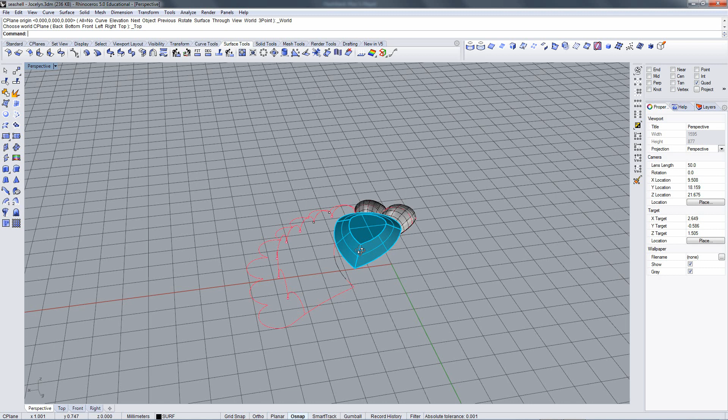First thing, you want to make sure that you have your stone up off the ground. You want to make your curves as simple as you can. So first thing you want is a general outline, which you have. But this is very, see how many pieces there are here? You don't need that many pieces.

So if I were drawing this curve, I would use my favorite sketching tool, which is interpolate curve, end snap. And then I would just draw something that I like. Like that.

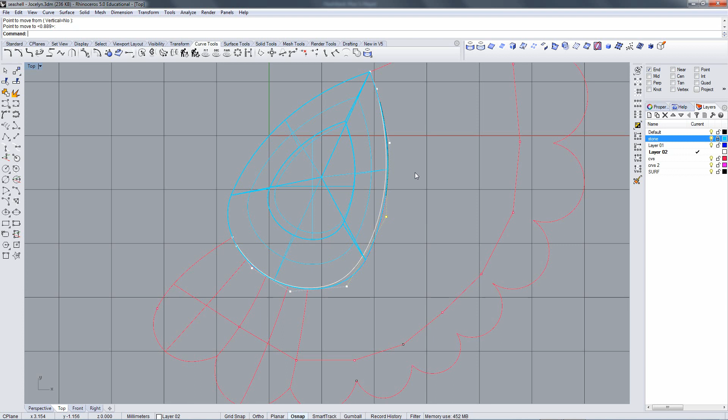You probably want this to come underneath the stone a little bit. So, turn on some control points. Just a little bit. Now these don't touch anymore, so I'll have to change that.

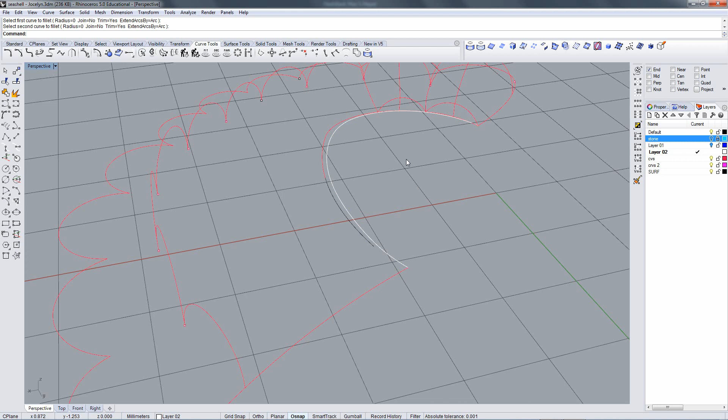The fillet set to 0. That'll bring those together. I want to see if it gave me 2 curves. See, it did. I don't want 2 curves. I want a simple, basic curve there. The math is really important. And for a curve that simple, I can do a 4-3, which is always a pretty curve.

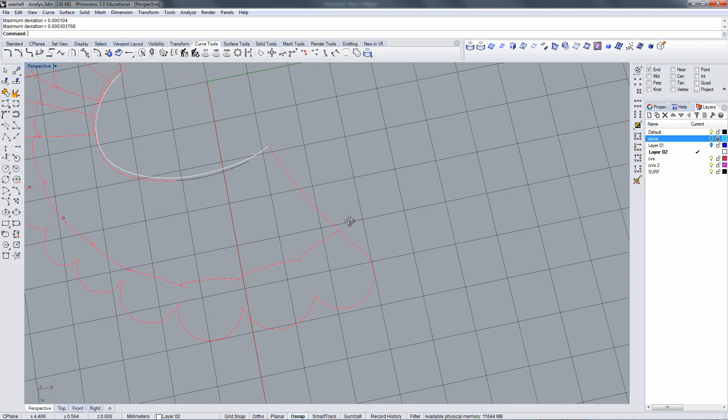So I've got that. How did you draw these? Was this just a series of circles? No, I did an arc command. Okay, and this is a shape.

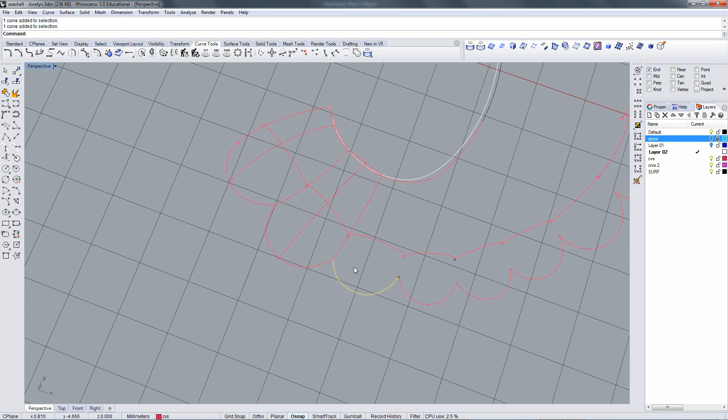Now, the challenge with what Jocelyn has done is that she's created a form that's going to be awkward to work with. I would always recommend that you make one of these and then shape it to do what you want it to do.

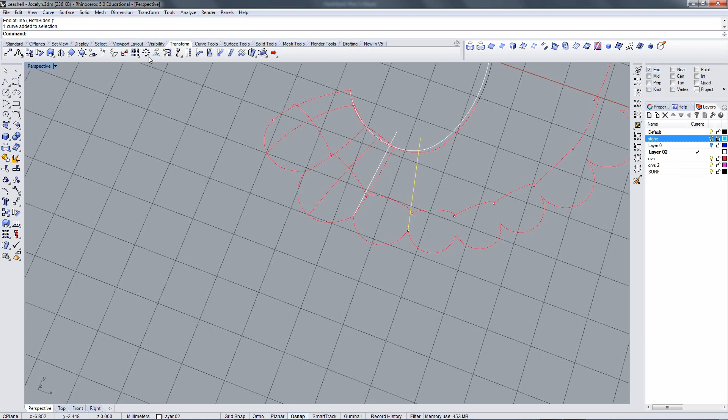So I would create one single shape. Maybe something like that. I'm going to want it to be a little bit wide. Better too wide than too narrow, because too narrow, I don't have enough material. Too wide, I have too much. I can live with too much.

I'm also going to move these down a little bit because I want a nice smooth connection.

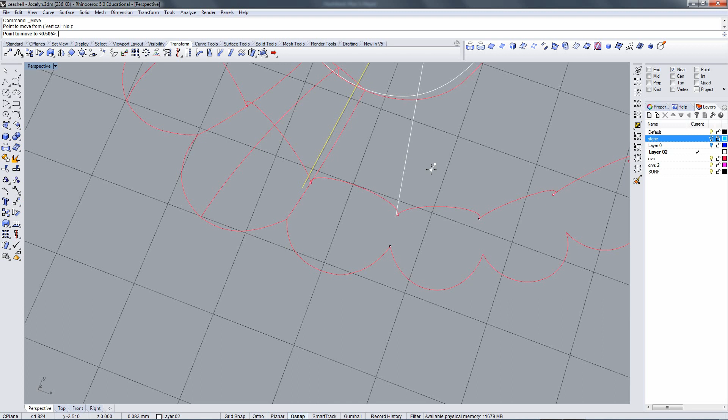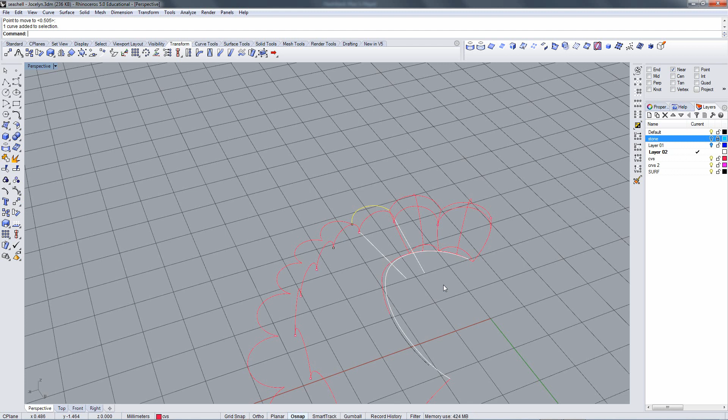I'm just thinking there's a more elegant way to make this, and I'm trying to figure out what that more elegant way would be. Whenever you're trying to make something simple, you try and keep it simple, if that makes any sense. And I think I can probably come pretty close to creating this with a solid.

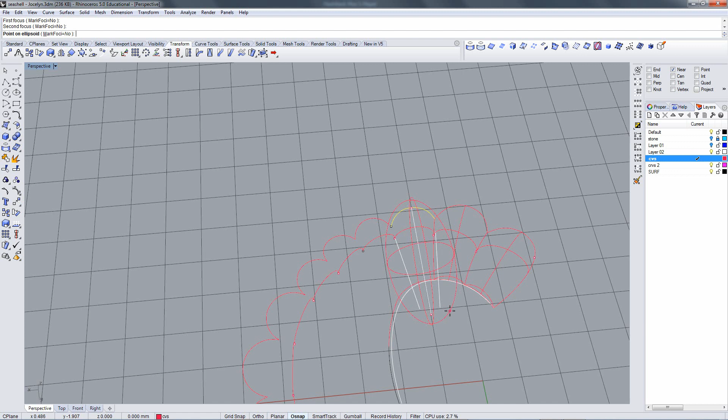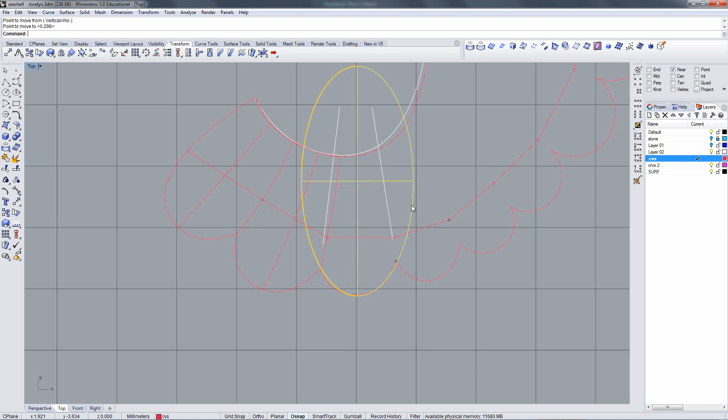I can probably do an ellipsoid, from like here to like here, something like that. And then I can decide how to make that work for what I want it to do.

Have you watched the video I put up on how to work with domes? I put it up yesterday. You're going to want to watch that, it's a good video. So my challenge with this object is that it's not on any construction plane I can use. And by now, you know Professor Nelson, he digs a construction plane. I am always fussing over construction planes.

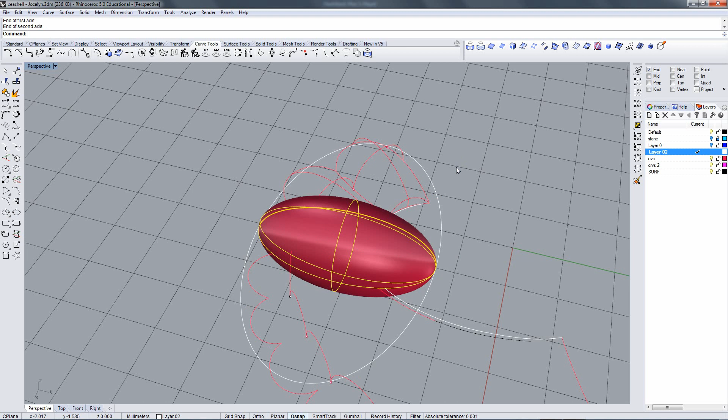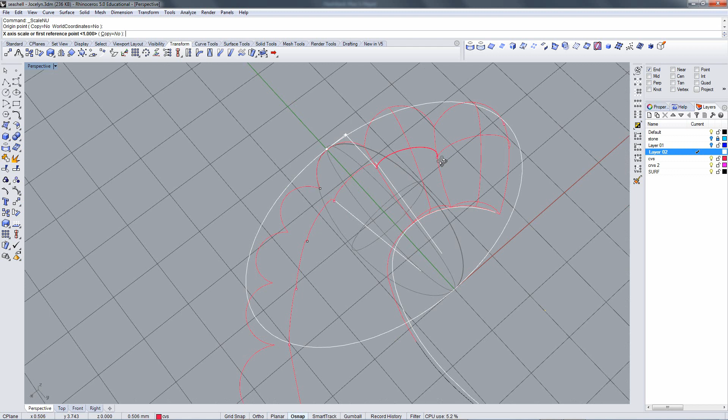If I set a CPlane to that, now I have a CPlane that works with this object. And that's important, because if I use non-uniform scale, it's always locked to the current construction plane. So now you can see those handles, see how they're parallel to the grid? That means I know what they're going to do, kind of like a top perspective.

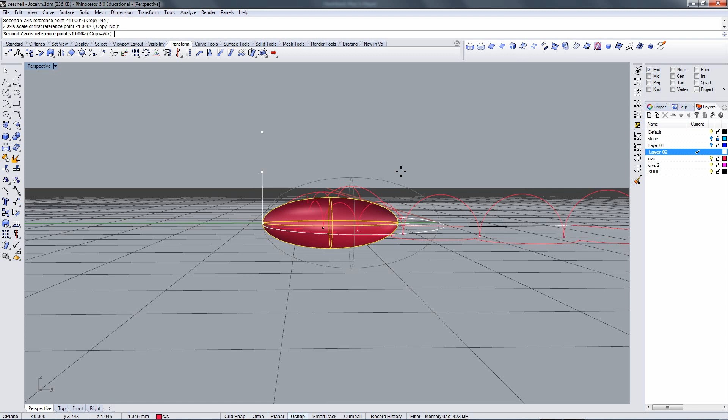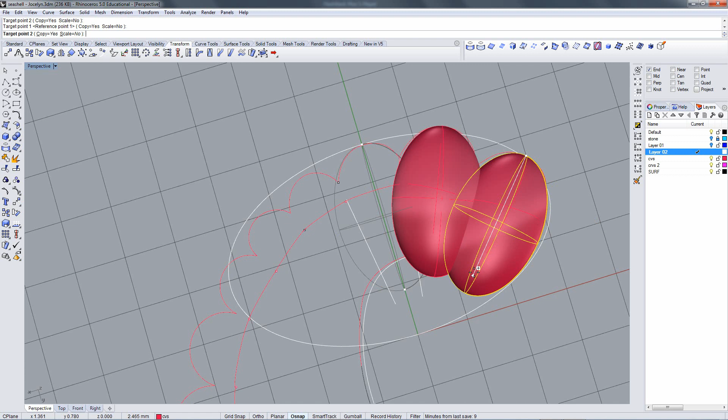That's giving me more. And then for height, I think maybe something more like that. I'm going to just put some of these out here, to see if I like what I'm getting.

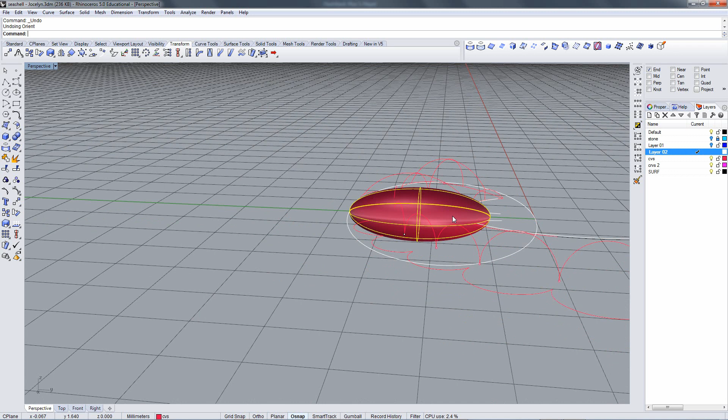Do you find that helpful? And it's not hard to do, right? It's easy to do. So now that I know that's going to work, I want to cut this in half, because I only want the top half of the dome.

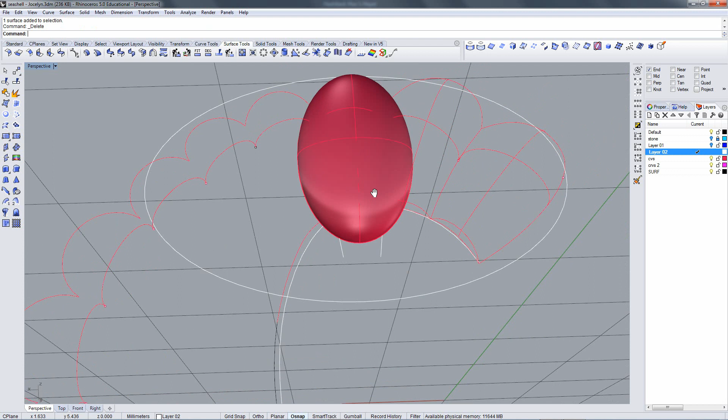Cutting plane, and snap. Trim the bottom off. And then in that video, I talk about how to make the surface shrink back. Because right now, if I untrim this surface, sorry.

Where's the surface edit tool? Right here. Thank you. And I hit untrim all, it goes back into being that. That means in Rhino's memory, Jocelyn, this will always be that.

But if I come back here and click on this tool, right click on it, the surface looks the same. But if I untrim it now, it looks like that. If I turn on the control points, they look like that.

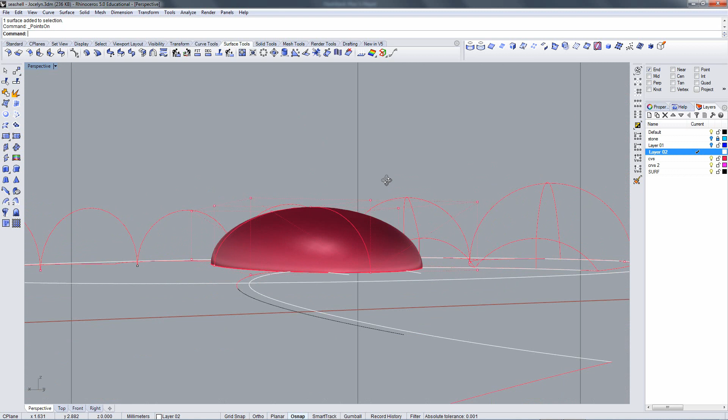And the other choice is to left click on it. That does kind of the same thing. You want to look and see which one you like better, but this did the same.

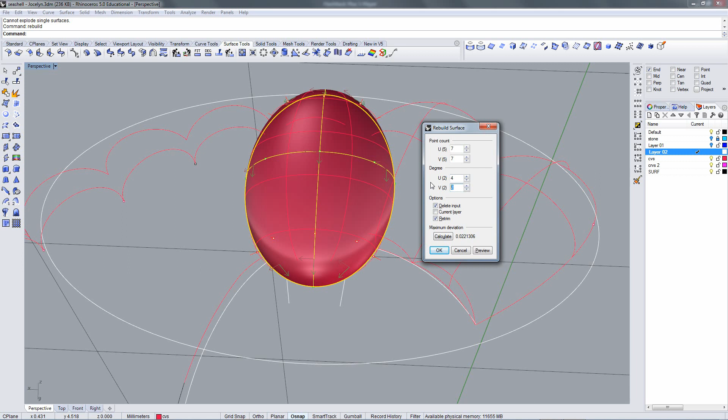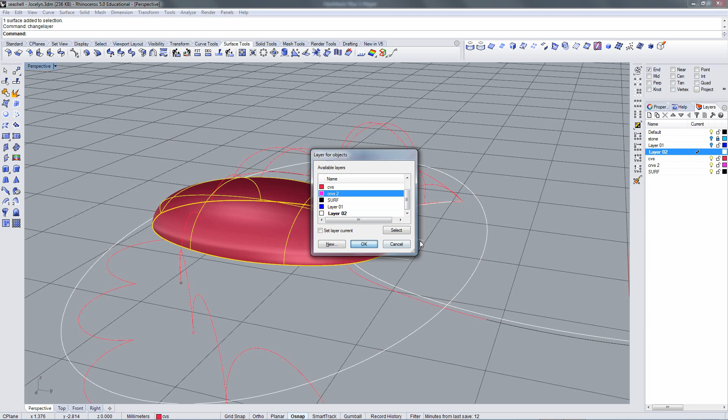So now I'm going to try and rebuild it, so I can get a surface that I can work with in case I want to. Now I'm done with that. The reason I did that, Jocelyn, is so that if I want to come in later and make changes to it, let's put this on a different layer so I'm not competing. Let's say I want to bring that down in elevation at some point.

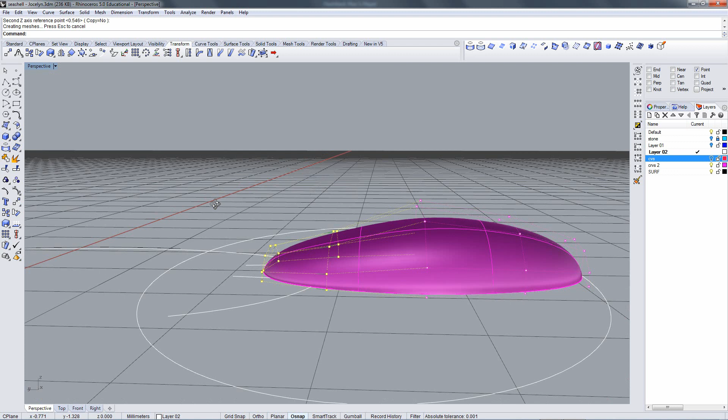I'll be able to do that. You can't do that with the ellipsoid, it'd be much harder. So cutting it into a simple surface gives me more freedom.

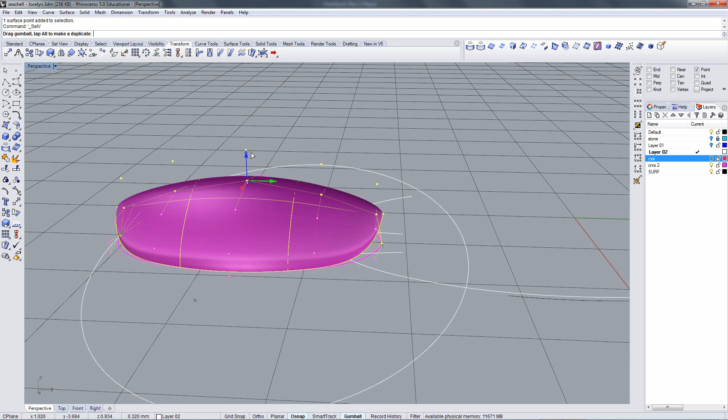If I wanted to, I could select all of those, except for the end ones. Don't want to pick the end ones because that'll lift it off the ground. So if I wanted to, I could do that. Take off the end ones again because I don't want to lift it off.

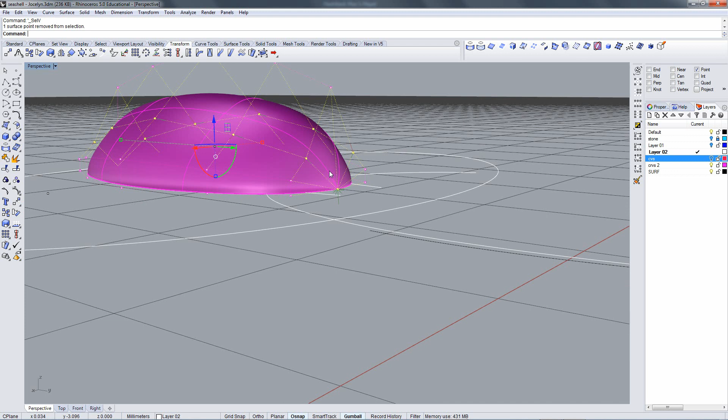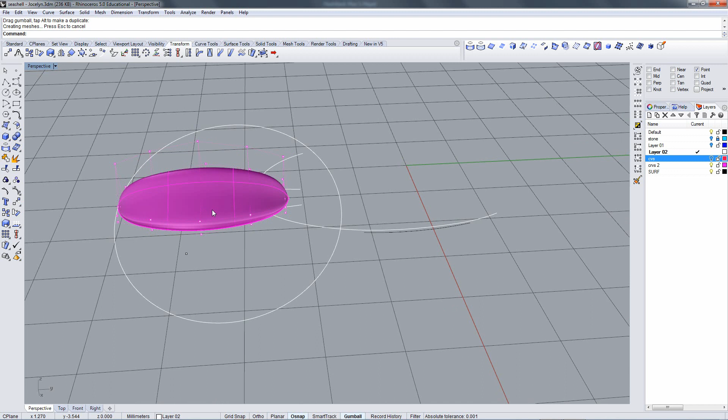Just as an example of things I could play with. And that kind of stuff would be very hard to do with it as a full ellipsoid. Whereas as this little surface, it's much easier to play with.

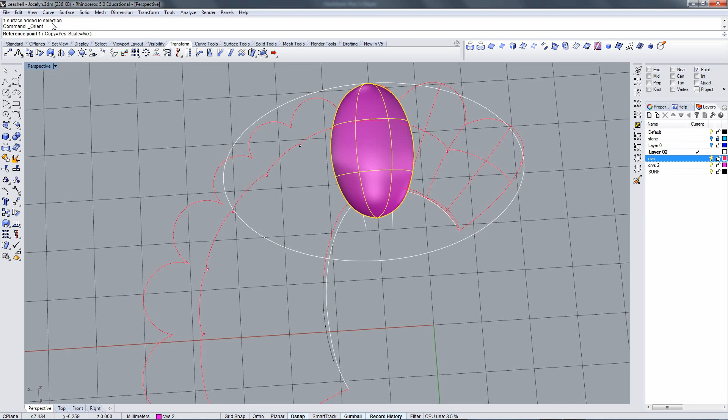Okay, so now I'm going to take this and do your pattern with it. I'm going to do that same, record history, and do that same command: orient 2 points, copy yes, scale no. And I can go into the top viewport for this. I'm going to pick 2 reference points, and then pick 2 target points.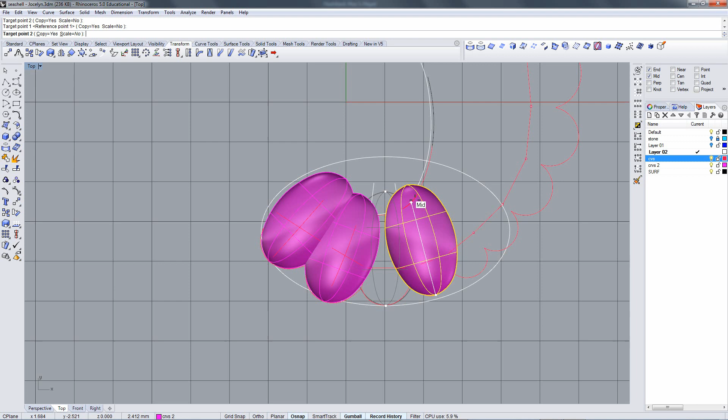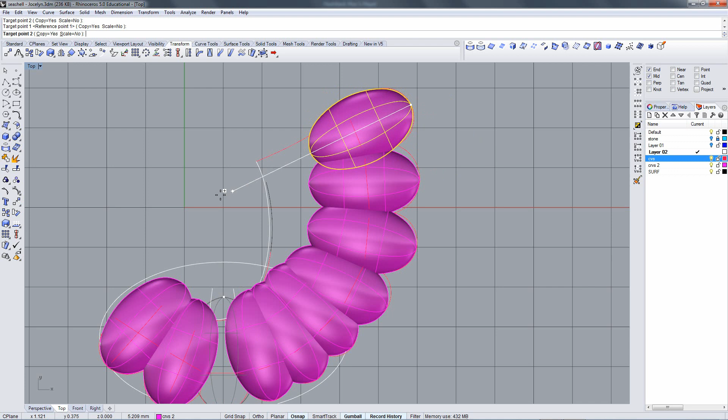And I can do as many of these as I want to. Okay?

It's not perfect, right? But it gives me a starting point to look at this thing and see what it is. To make it better, first I've got to remember which one was my first one.

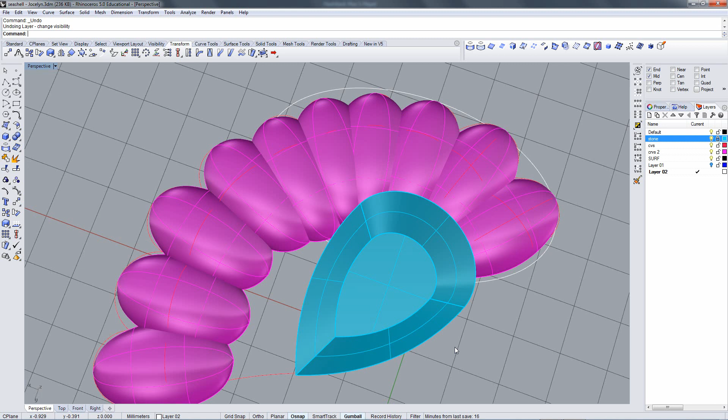So I want you in a color I can find. Because now, if I change this one, they all change.

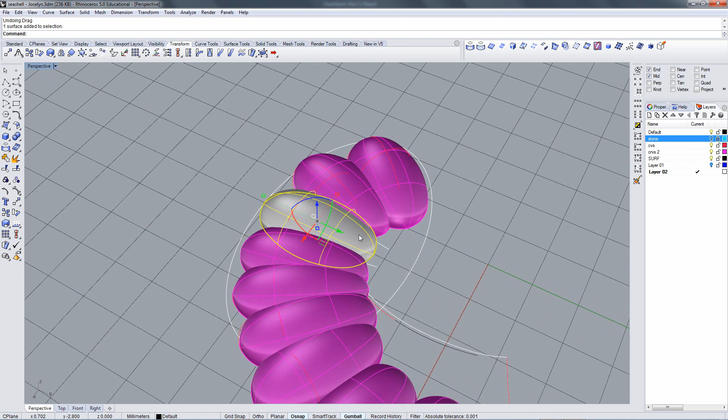And that'll be helpful because I do think I want to play with those control points a little bit. I think it would be cool to bring them down.

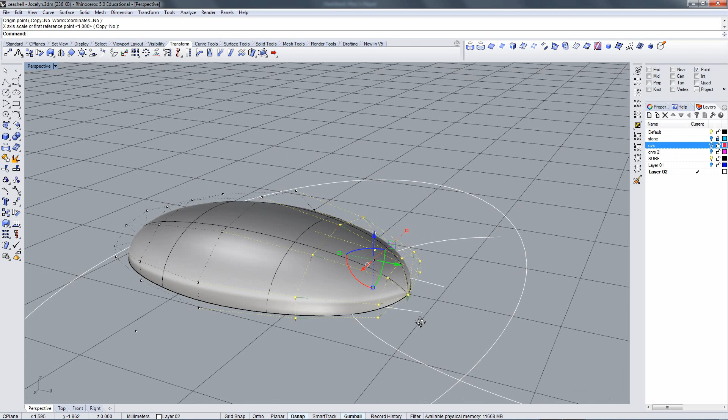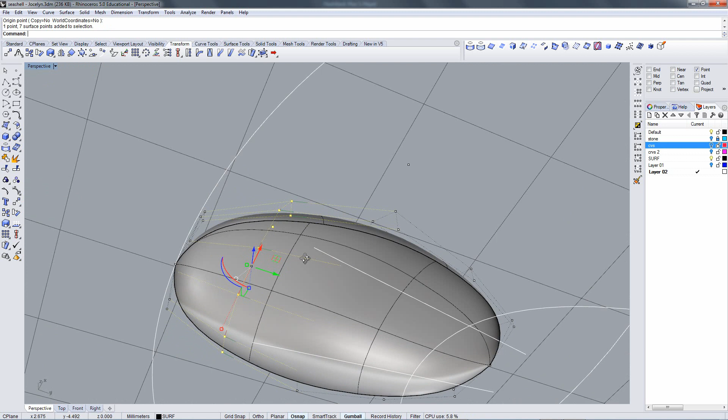Maybe. And also like to lift these up. Only want... not sure what that point is. Okay, apparently it was in your drawing. All right, scared me a little.

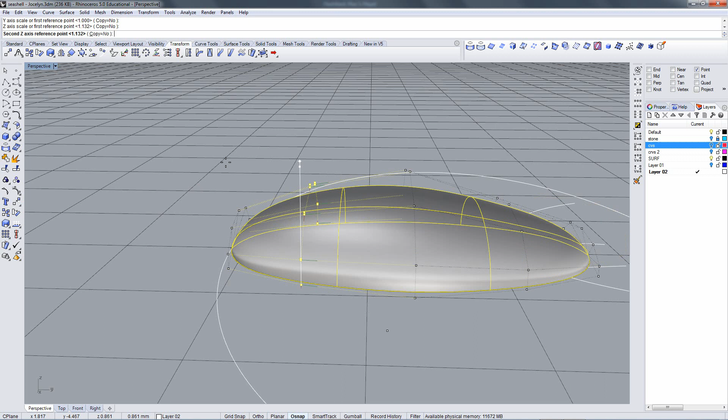That's going to give me a little bit more of a... Now that I've done that and I look at all the other ones, they will have done the same thing.

Now I'm going to come back and look at your individual petals. Put your drawing back on for that. It's going to yell at me every time I move one of these. And I'm okay, I don't care.

I'm going to set a CPlane. I'm going to have to keep setting CPlanes for each one of these to make it do what I want it to do.

But since CPlanes are easy to make, all I'm going to do is make an oval that this sits on using the two ends. I don't care how wide the oval is, it doesn't matter. The CPlane will still follow it. And that's important to me because I want to do my non-uniform scale.

No change this direction, but you want that to come all the way back, right? And nothing in the Z, because that's the first one.

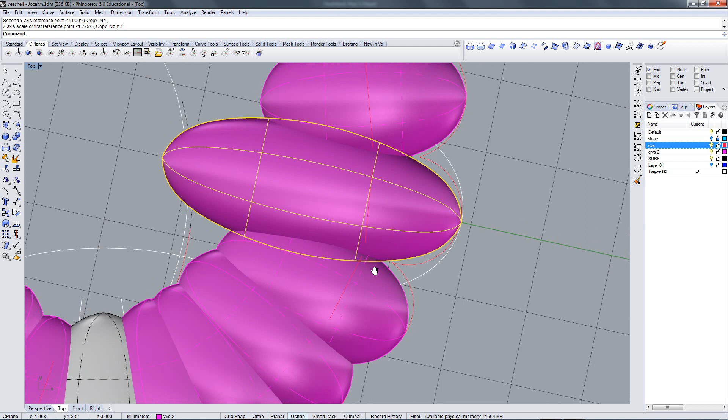I'm going to come over to this guy. I'm going to move him here. It's going to get angry at me. Got to do the same process with the CPlane. Give it an oval that I can assign the CPlane to.

Take this and do a non-uniform scale. Now I think this one's a little too narrow, I'm going to fatten it up a little bit. I think the other one was a little too narrow too, I'll go back and fix it.

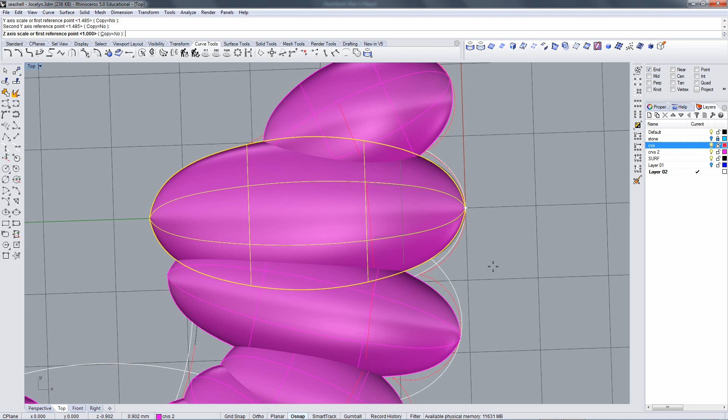And then we have this one. Set an oval to it. Set a CPlane to that oval. And I can play with this one as well.

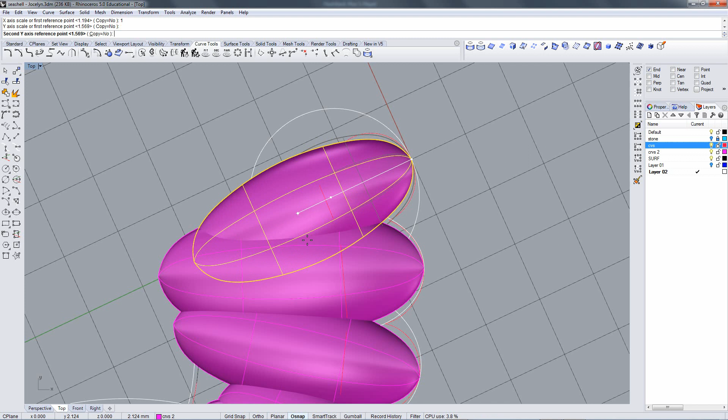Okay, so you can see that I am going to end up assigning a CPlane to each and every one of these. Before I do, though, I want to make sure they're in the right position, because there's no point setting a CPlane if I'm going to change the location.

So put it in the middle. Take a look and see if I think that's a good angle. I think it's a pretty good angle. And then I'll put a curve tool.

CPlane, oval. Same thing, non-uniform scale. I'm always looking: if I don't want to get wider, I leave that at 1.

This one I want longer. This one I want to stay the same height, so I keep it 1. Move to the next one.

Now at some point, these are going to be okay. I think this one on are all right. I think this is the last one I have to fuss with.

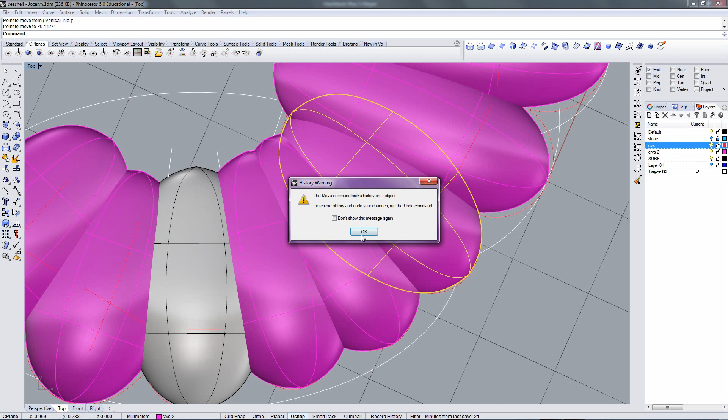I think it needs to be rotated a little bit too before I make a CPlane for it. Yeah, like that. And now I'm going to make a CPlane for it.

Set a CPlane to that oval. So why can I set the CPlane to the curve but not to this? Why can I set the CPlane to this curve but I can't set it to that?

Oh, because that object's... what does a CPlane need? A CPlane? Yeah, the key is in the second word. Plane? Yeah, what does plane mean in Rhino? Means flat. What? This is planar.

This is planar. In Rhino it means flat. So when you say set CPlane, automatically it's looking for something flat. It has to be a flat object, flat in dimensional space. The front of the screen is also planar, that wall is also planar, that picture frame is also planar. But you can't set it to the surface because the surface is round. Rhino won't know how to set a CPlane to something that does this. It has to be flat. That's why.

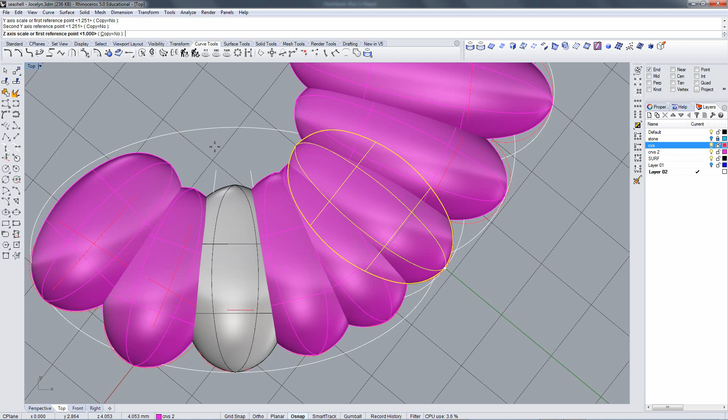Okay, so now this is the new basic thing, right? I'm going to go wireframe. And for each one of these now, I can come back and do more control. I'm going to set a CPlane. You're going to use those CPlanes again and again for each one of these. Turn on the control points.

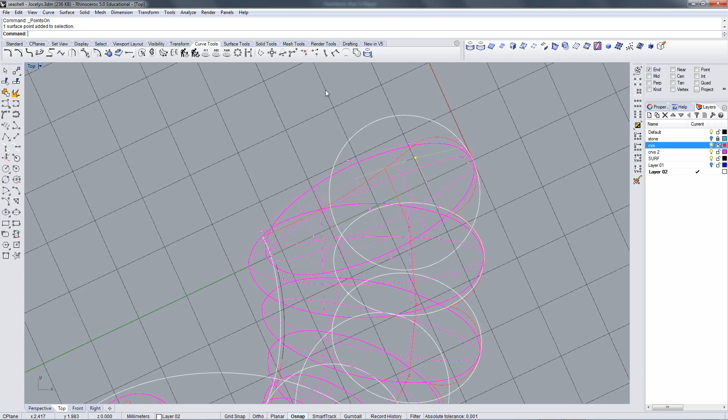This is a cool toolbar over here. You can find it under Select. It's the little magnifying glass with loops. It's the lasso points. If you click on the little black triangle, it'll give you that toolbar, and then I just come over here and slap it on the side. That's really useful because you can use it to select a whole row of points.

And once you've got a whole row of points, because the grid, the CPlane, matches this, I can just hold down ortho and push. Same thing here, I can grab that point, set of points, because I used an odd number of points, Jocelyn, so I have a center line. I can snap to that center point, and I can make it narrower here.

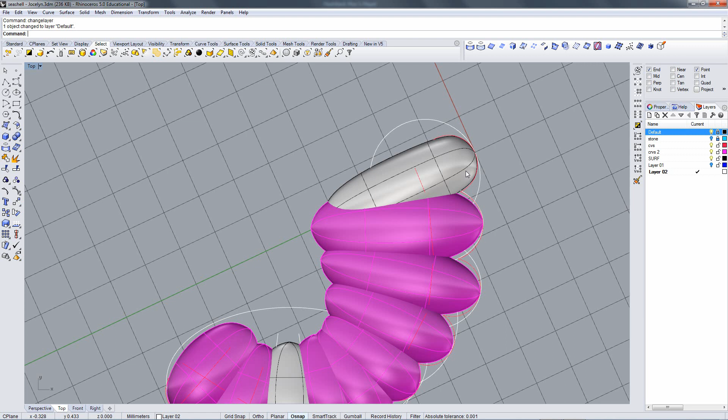And that's a different thing than we had before. Each time I've changed one, I'm going to put it on a different layer so I don't get confused as to what I've worked on and what I haven't. And I'm going to lock that layer so I can't accidentally select it anymore. Going to the next one: wireframe mode, pick its oval, CPlane to object, turn its control points on, grab this row of points, pull them forward.

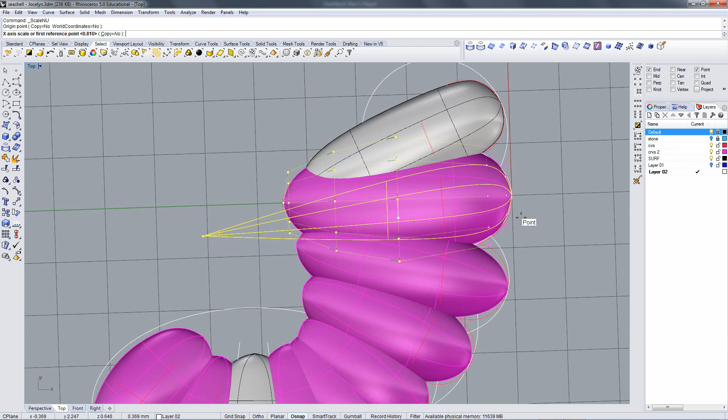I think that might be okay. I don't know if I need to, maybe I will taper these down a little bit, all of them. If I want to do it gradually, I'll do one row, deselect that row, do the next row, deselect that row, and do the last row.

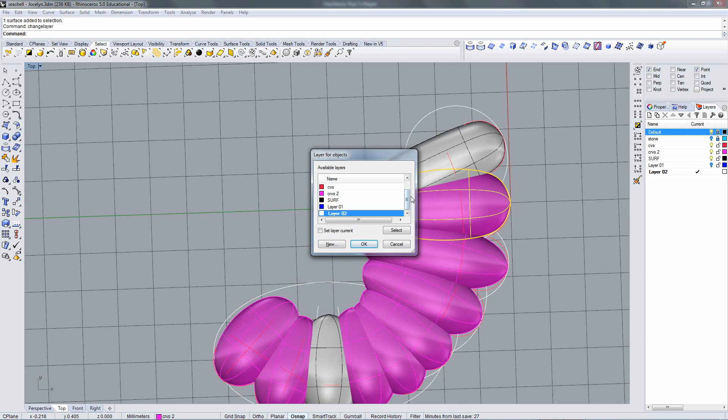Okay. Same thing here, but in order to work on this, I can't use this CPlane, can I? Because if I turn on my control points and grab that same row of points, Jocelyn, and hold down my shift key so I can move them straight, are they going to go this way? No, they're going to go that way. They're going to follow the CPlane. Can you see the grid? See how it's following the grid? It can't go any other way as long as I'm holding shift key.

Now I can try and do it by eye, but that's a mess. Whereas if I just select its oval that I made for it, and set a CPlane to it, now I can grab those points, use my shift key, move them forward. Easy. I'll do the same thing I did on the last one.

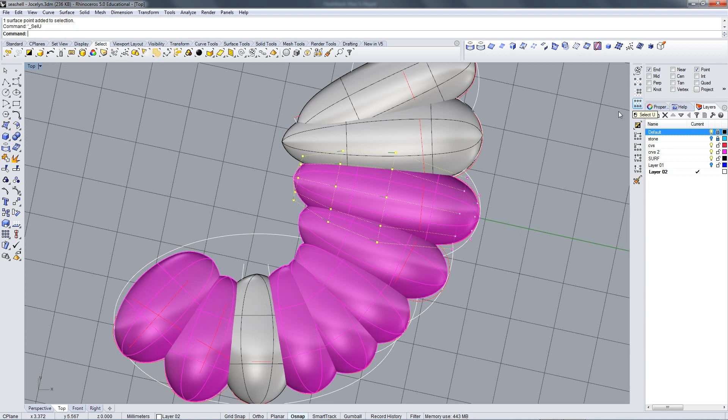I'll grab those three rows of points, do a non-uniform scale, deselect... oh, didn't want to do that. Instead of deselecting it, I'll just select the next two. Non-uniform scale. And that's probably enough.

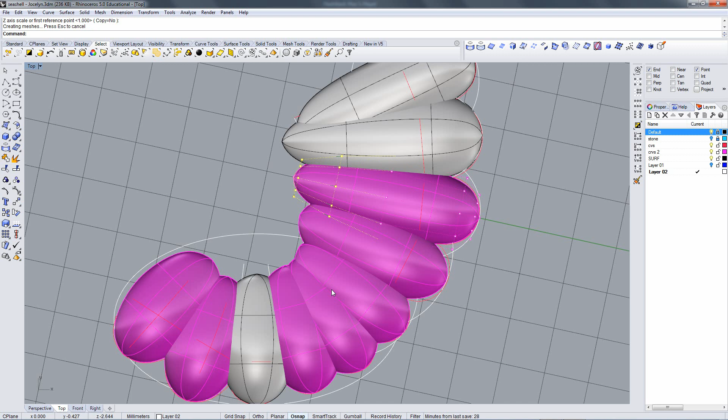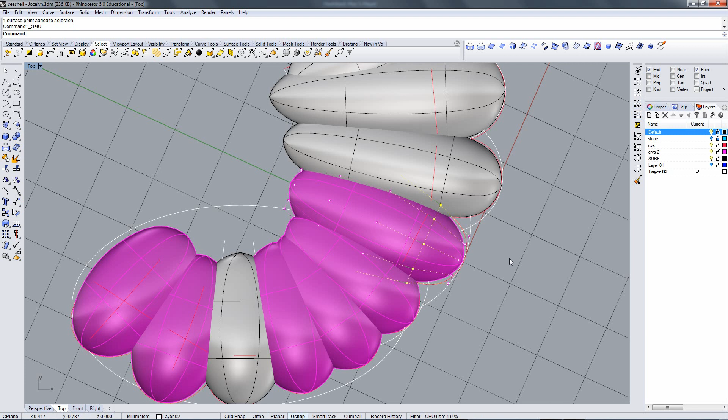Now for a maquette, this is pretty detailed, probably more detailed than you would ever have to do. Is it taking me very long to do? No, it's not. Setting a CPlane, turning on my points, grabbing the points, moving them. Actually, this one I'm probably going to want to grab this row of points and move it too, it's just a little too pointy. I think the width on that one is okay.

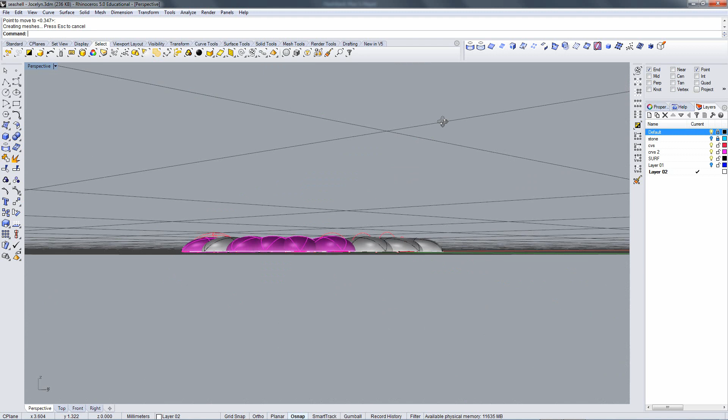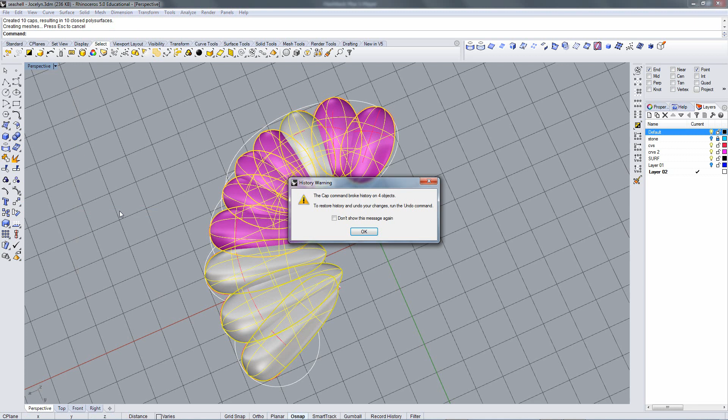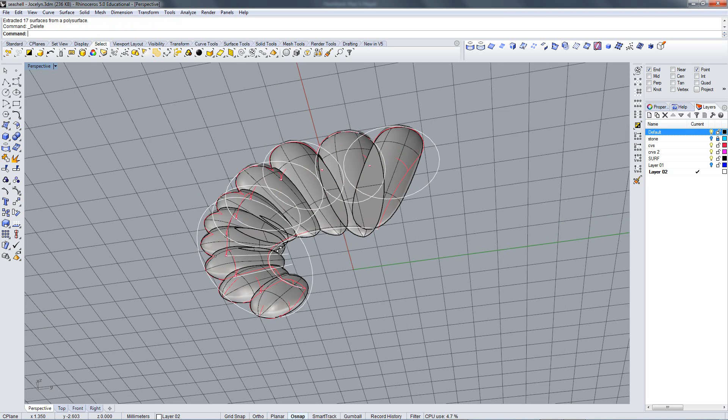So, that's my new set of stuff. Now what I'm going to want to do is put a cap on the back of each one of these so they're a solid object, because they're all flat and open on the back, and if it's flat and open, Rhino can work with that. Solid cap planar holes, solid union. Now I'll come in and take the bottoms off. I only put bottoms on it so I could Boolean union it. I don't really want bottoms yet because there's no thickness yet. So get rid of all of those little pieces.

Do you understand what I'm doing with that? I right-clicked on this. If you right-click on it, it extracts a surface. Then I can choose whether I want a copy of the surface or not. I'm saying copy no, so it'll strip it off, and then I'm deleting it, because what I want to see is just this kind of open shell shape.

I'm going to grab all of those, duplicate the edge, and extrude it straight down. Maybe about that thick.

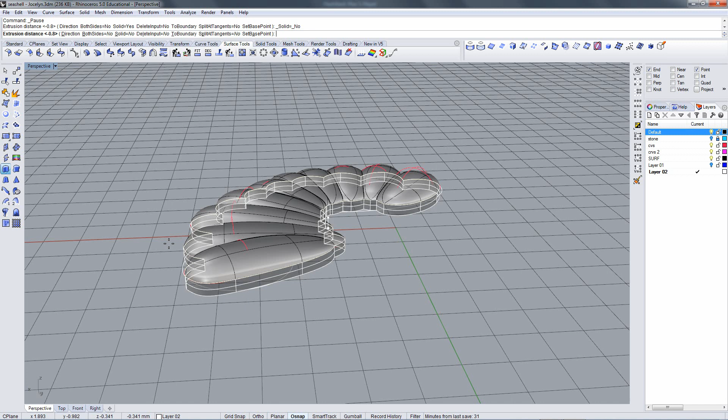1.5? Does that look thick enough? What thickness, what looks good to you? 0.5? That's too thin. Just do it by eye. You're the designer. Does that look about as thick as you want it, or do you want it thinner?

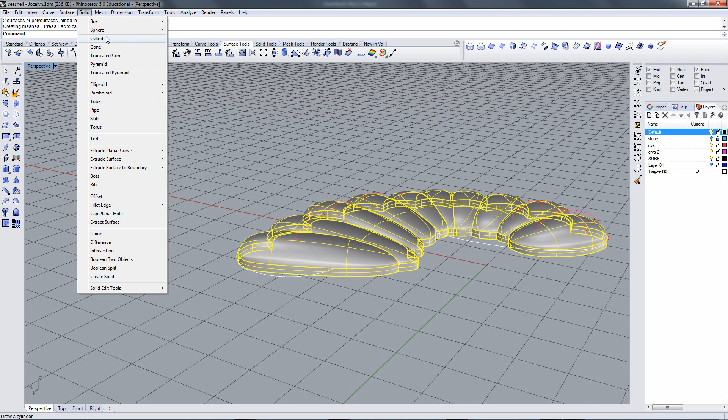About here? Okay, fine. So you've got that. Join that together. Put a cap on the back of that. Where to go? Cap planar holes.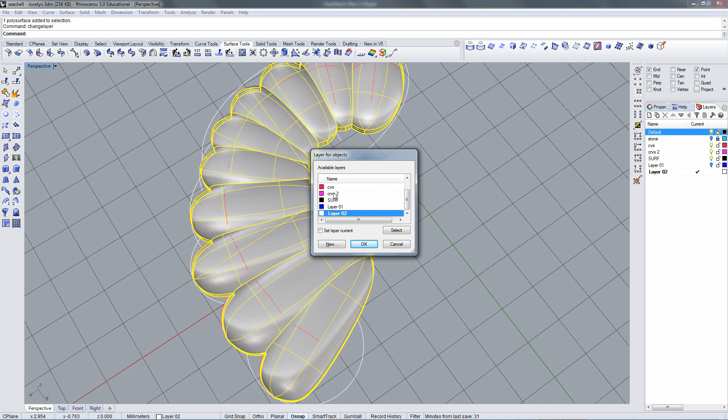And there's your cake. It's not perfect, it has problems, but you wouldn't want to spend any more time than this on a maquette. This is just to show yourself, do you like it? That's its only purpose, is for you to be able to look at it and go, do I like where that's going? And in your case, you have a couple more steps to do because you already know what you want the outline to be.

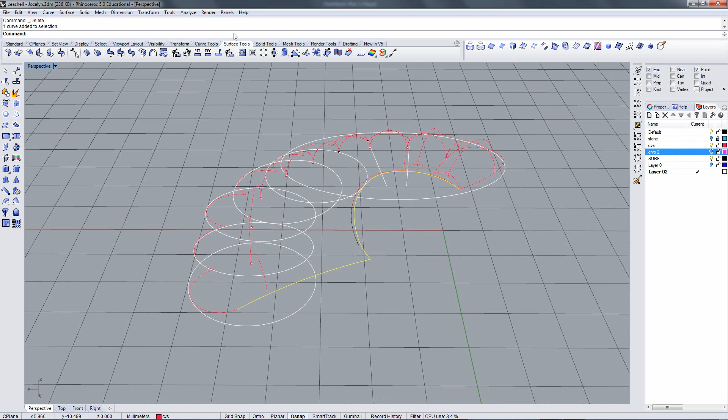So I'm going to grab those two things, join them together. I don't need that big line going around the outside edge anymore. And I'm going to extrude. Oh, and then you can cut it? And then I can cut it, you bet.

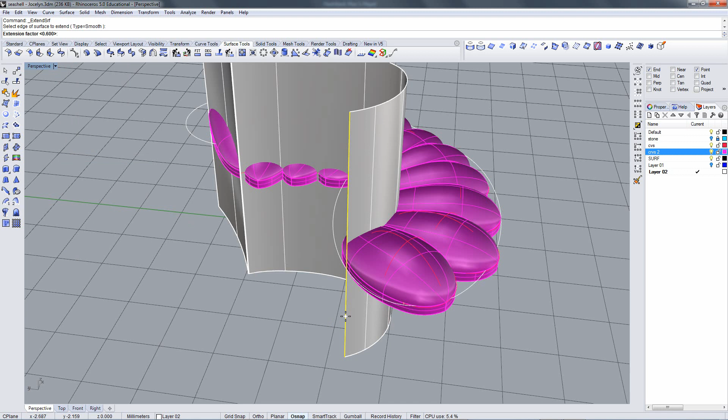Solid difference. It says no. And the reason it says no is, see how that doesn't come all the way through? It has to reach. So explode it. You can't extend a surface that's joined to another surface, but once I explode it, I can use the extend surface command, select the edge I want to extend, and hit enter. Now I can join those back together.

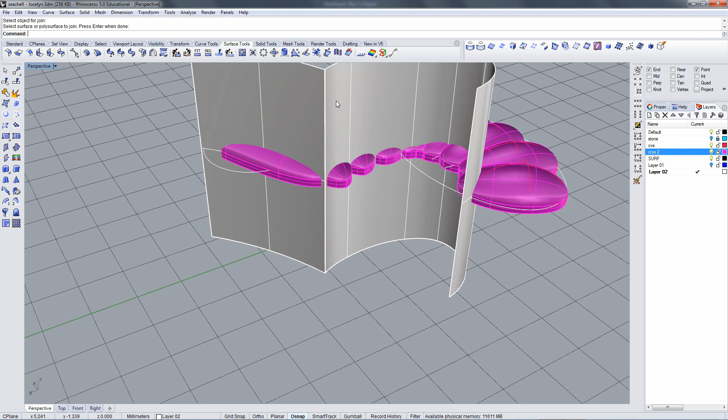It doesn't want to join back together. Well, that's rude. Cut separately, or let's see. Oh, it's because there's a little teeny thin surface. That's annoying, but okay. Join you to you to you. Fine. I need to check the direction on this because I want it to point towards what I want to keep, and I want to keep this, so that's good.

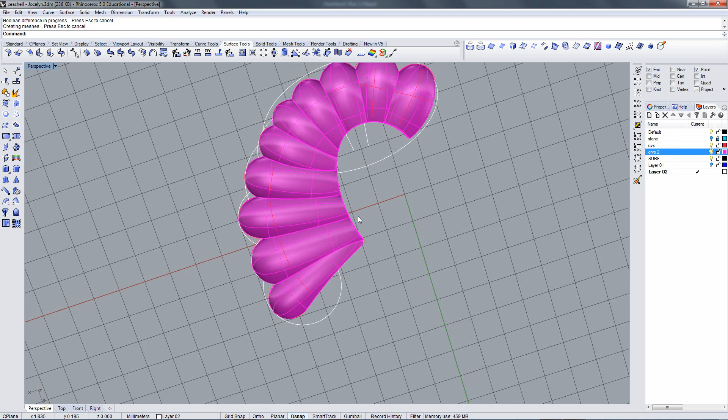Solid difference. Okay, now there are some problems. You don't really want this thing curving like that. You would want to do some individual sweeps and get this really pretty for your finished model, but you're not doing a finished model, you're doing a design. So you can make these lines pretty with your pencil, right?

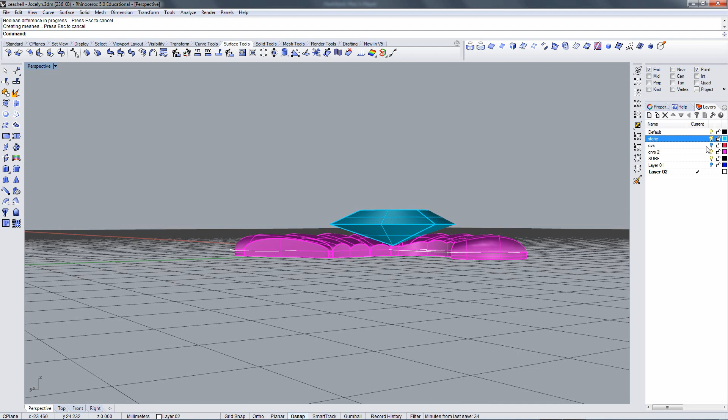This just tells you the thickness, tells you if it's going to work or not. I'm just looking at the side thing. Yeah. And now you can tell if it's deep enough for your stone. You can go a little bit, actually you would probably pick this up

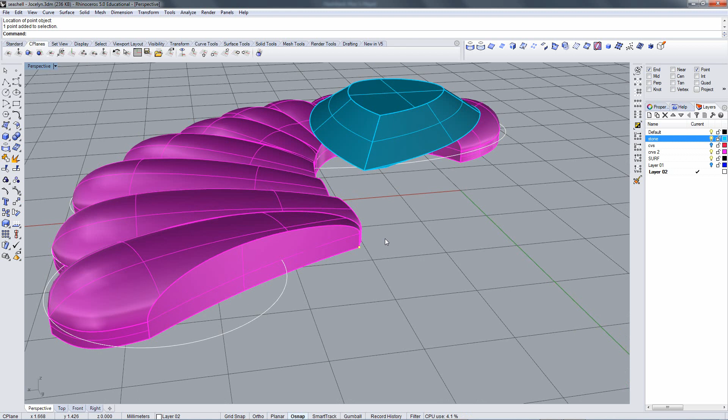so that the bottom of it is the same as the CPlane. So if I want to move this up exactly to the CPlane, I'm going to use a point object as a helper. I'm going to put that point object right there, and then project it to the CPlane without making a copy of it. Then I can just use point snap, move it from here to there. Delete the points.

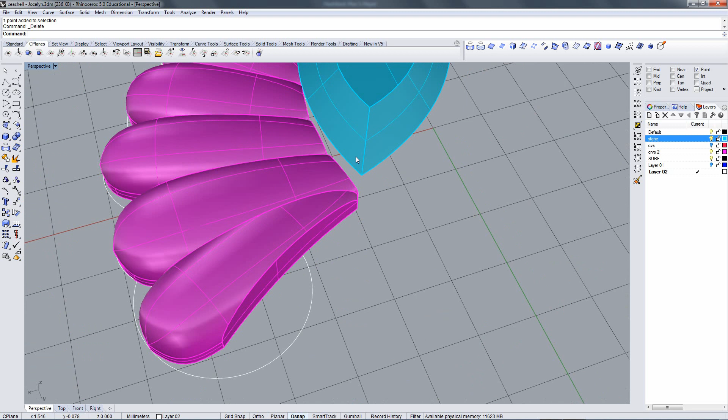So now I can look at it from the side, and that's about right. I don't think you would want the stone any deeper than that. It's still not running into the stone, but you could connect it to the stone with an under bezel and that sort of thing. That is not a bad little maquette. I don't need to make the under bezel.

No, you can draw it. Now that you understand what an under bezel is, you only have to make what you need to make. If you don't understand the under bezel, make it. If you understand it, draw it. Because making takes more time than drawing, and you're designing in this class, so you want to move as quick as you can. This is a decent maquette.

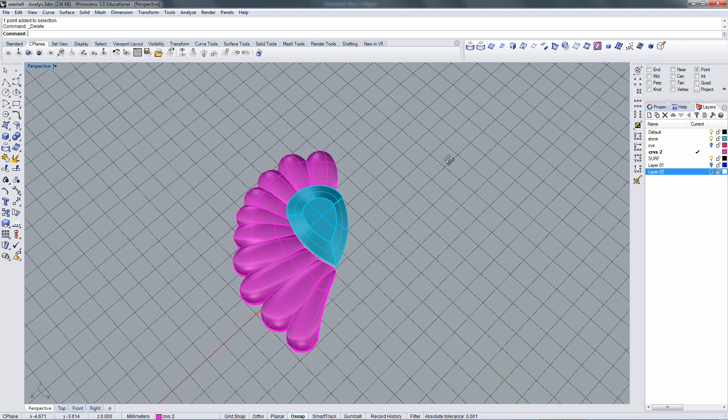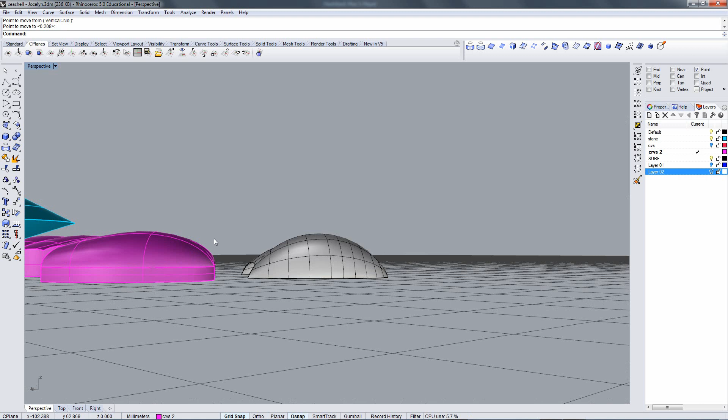Helpful? And you can see if you compare, these are much lumpier, frumpier, stranger shapes than these are. Before I Boolean them all together, I could work with each one individually with control points, I could change how it looked. These are very difficult objects to work with. If you turn on the control points here, that's a very strange object to try and work with.

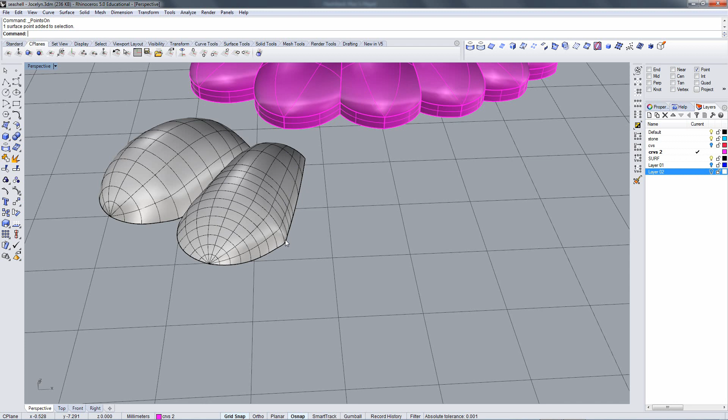But how does she do this? Oh, she did this with a surface from curve network: curve here, curve down the middle, curve there, cross sections, and then surface from curve network to create it. But it's just a more rigid surface than you needed for the maquette. The ellipsoids were more forgiving to play with.

Okay, I gotta go. Meeting time for me. I will save this.